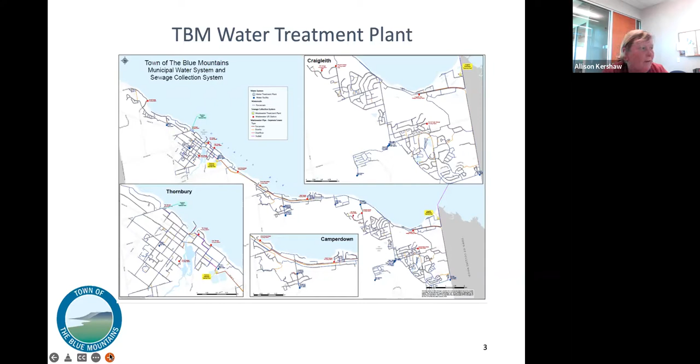This gives us a bit more description of some of our facilities. The elevation in the town of Blue Mountains makes it challenging for a water system, as we have 14 different pressure zones, so we have many different ways of boosting and reducing pressure. You can see a number of different booster stations on the map, as well as reservoirs for additional storage. That's how we manage keeping our water pressure within a reasonable range.

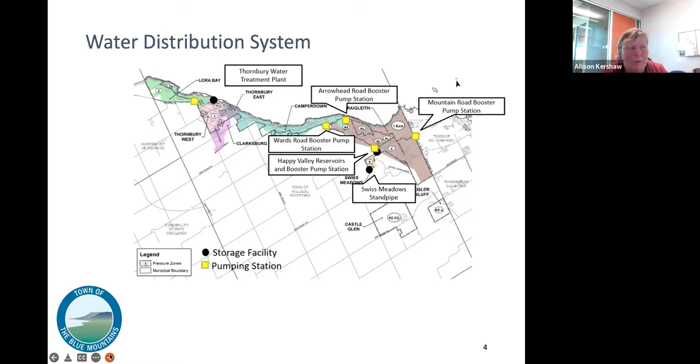For a drinking water system, there's a lot of approvals and oversight. The Ministry of Environment, Conservation and Parks play a big role. They've issued us a drinking water license and a permit. We also have a permit to take water, and we have to monitor how much we take from the bay, with an upper limit to what we can take. Additionally, we have a drinking water quality management system which we're accredited to maintain. We're audited by an external auditor every other year and an internal auditor every year.

Our water plant is situated on the shores of Georgian Bay. It was originally constructed in 1978 with a rated capacity of 5,000 cubes a day, retrofitted in 1988 with 2 Trident adsorption clarifiers giving it a rated capacity of 13,000. In 1991, it was re-rated to 13,536 cubic meters a day. Then in 2009, we replaced the existing conventional filters with a Pall membrane system. Currently we have 3 Pall membrane trains running, but it has capacity for 2 more, so we do have additional capacity at the plant.

So there's our plant. It's at the end of Peel Street at the west end of Thornbury. It's a surface water plant and the source is Georgian Bay. Our intake is roughly 600 meters off the shore, directly out, in 8 meters of water. Really great source water - it's a rock bottom there, and it's excellent source water.

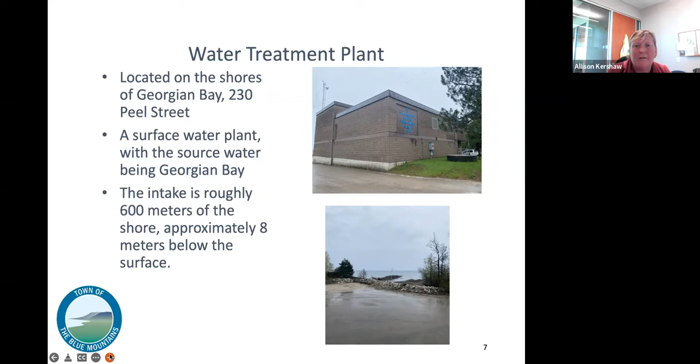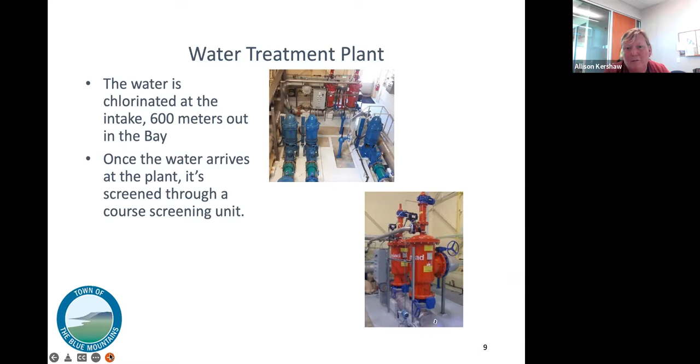That's just our treatment train, and I'm going to go through it in a few more steps in the next couple slides, because that's kind of hard to read, but it shows there's a lot going on. In the top picture, you can see the blue pumps sticking up - those are our low lift pumps, which bring the water into the plant. There's 3 of them, and behind the red, they look like pumps, but they're screens - screening units that do our coarse screening. You can see them in the bottom picture as well.

After it's screened, it goes through the Pall membrane system. That's the 3 trains you can see in the upper picture, and in the lower picture, that's what the inside of the Pall membrane looks like. It's like spaghetti - the untreated water sits on the outside, and it's like a straw, sucking it through the membrane. It does an excellent job of controlling pathogens, and it's really an excellent system.

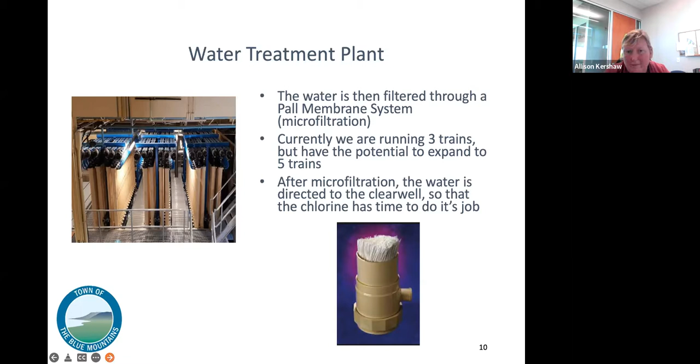After it goes through the membrane system, it enters our clear well. It sits there to allow the chlorine that we put in at the intake to react. We chlorinate with chlorine gas right out at the intake, so it goes 600 meters right out into the bay. Then it sits in our clear well, giving the chlorine time to react and kill everything in the water.

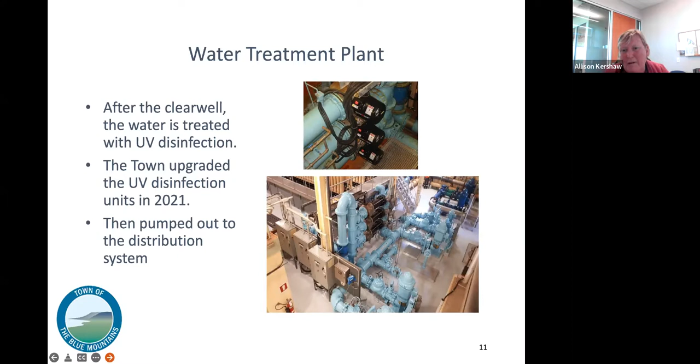After it leaves the clear well, it then goes through UV disinfection. You can see in the lower pictures the 3 UV chambers, and then it's pumped out by the pumps near the bottom - those are our high lift pumps that pump it out into our distribution system. So that's our plant in a nutshell.

Additionally, at the plant, we also have a backup power generator - a 400 kilowatt diesel generator. If the power goes out, or if the power supply is even interrupted, it starts up automatically, so we can continue to make water without even noticing.

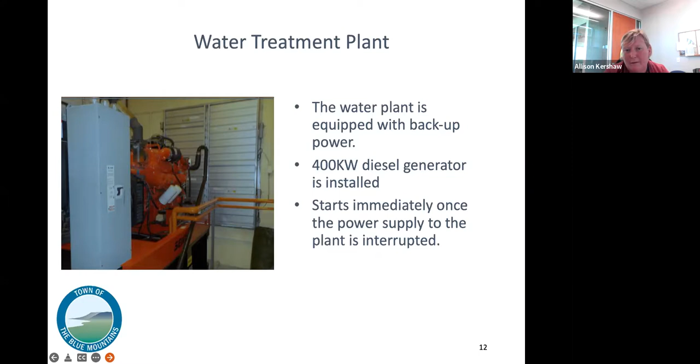So currently our water plant can provide up to 15,140 cubic meters a day. We have an agreement in place with the town of Collingwood to take up to 1,250 cubes a day. However, we only take about 400. And we also supply Collingwood some water too. We feed back into their system, mostly down Long Point Road where they don't have any water mains.

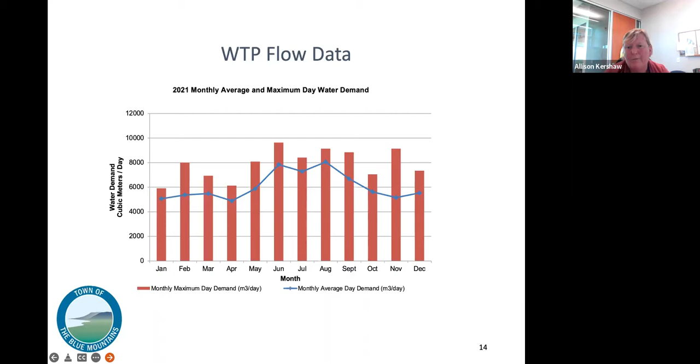So we can move on to the next. And this is where we sit for capacity. So right now our allocated units is the blue, and that allocated means people who are connected already, houses that are connected already, and houses that can connect, meaning that they have a water main in front of their house and they have a lateral to the water main. All they have to do is hook up. So that's how many people could be connected at any point in time.

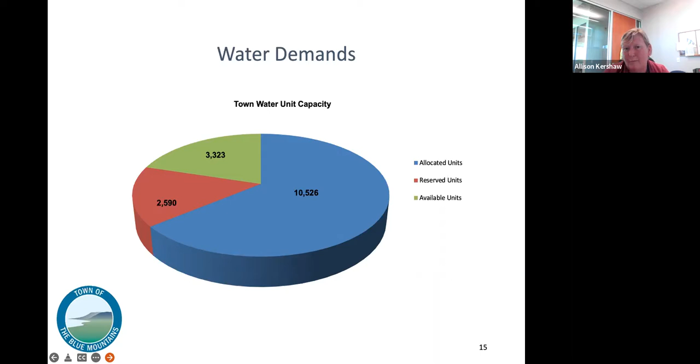And then the next is the red chunk is the reserved units. That means they have been given approval to build a distribution system or a development. And the third, the green 3,300 units, is available to be connected. And those numbers are as of December 31st, 2021.

So this shows our historic water demand over a number of years. The orange line at the top is the total water that's available. Now you're probably wondering, why did it drop down around 2014, 2015? Well, we reduced our water taking from the town of Collingwood. We were taking 4,000 cubes a day, and then we dropped it down to 1,250. So that's why the actual firm capacity dropped down.

The blue line indicates the reserved and allocated. The light green is the allocated, and the dark green is our actual connected units. So you can see that we do have a fair bit of capacity left in that plant.

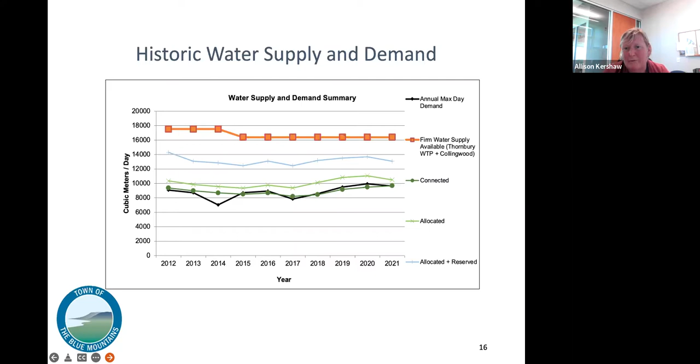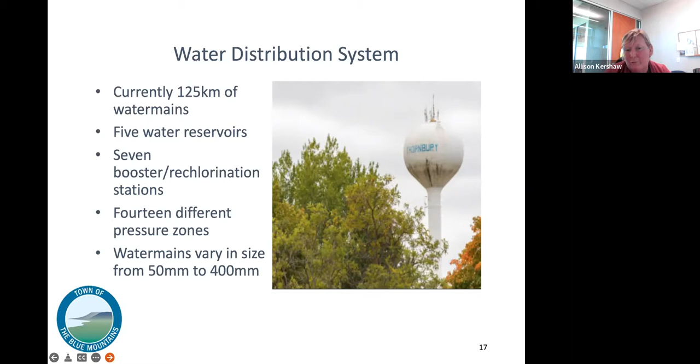On to the next. So our distribution system, we currently have 125 kilometers of water main, 5 reservoirs, 7 booster stations and rechlorination stations, and 14 different pressure zones. And our water mains vary in size from 50 millimeters, which is 2-inch, up to 400 millimeters, which is 16-inch water mains diameter.

And I'll turn it over to you, Shawn. I think you were going to do this one, and then I was going to take it.

Yeah, so this indicates our leaks. This is our infrastructure leak index. And right now we're running about 32% water loss, which sounds really shocking, but when you consider the dynamics of our municipality, and we use a fairly complicated spreadsheet to determine our infrastructure leak index, we are in the good range. Now that considers things like the density of our properties. If we had a lot of properties in a small block, say something like the city of Toronto, we would be selling a lot more water, and therefore, even if we lost the same amount, our percentage of loss would be much lower. However, in the town of Blue Mountains, we have a lot of estate type lots and long stretches where we don't have any users. So we have a number of connections of pipe, and you can think of every connection of pipe, there is a potential for it to leak. So it takes that into consideration, and the pressure zones that we have, we're running about 3.7 on our ILI, which is considered in the good range.

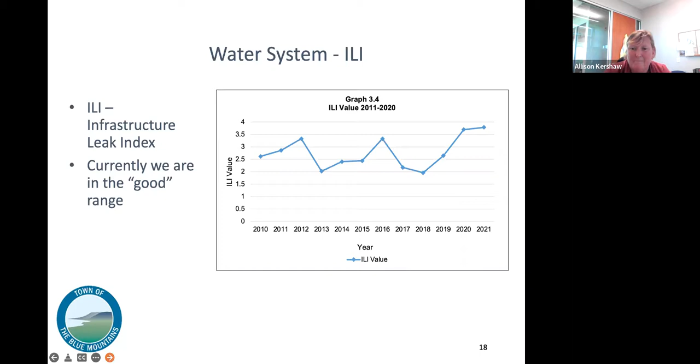So I'll just quickly go through some of the challenges that we deal with our water system. As Allison said earlier, we do have 14 different pressure zones, and that's partially part of our topography, the long run we have of our system along the shoreline. And part of that is trying to keep our water pressure for residents within a certain range, so it's not too high or not too low. And that does cause some challenges for our operators, and there is a cost to doing that as well in terms of pressure reducing valves, et cetera. We spoke about the long, narrow system with few users, and Allison had talked about that and the significant leaks. We'll talk a bit in a couple of slides here about what we're doing to address that. We do have some undersized and challenging water mains. Again, we have a program to deal with that on a capital side.

The other issue, which has been ongoing and as of late, is some discussion with council around common element condos and private water systems and private plumbing within those common element condos that in some cases loop back onto our water main, and our water team does a great job of trying to manage that as it relates to the interface with our public system.

Water theft is an ongoing challenge that we have both with existing users and in development as well. On that, we did get approval from council to add an additional water and wastewater bylaw officer, who has additional kind of penalties now, or will have additional access to other tools in the compliance toolbox, so to speak, to deal with water theft.

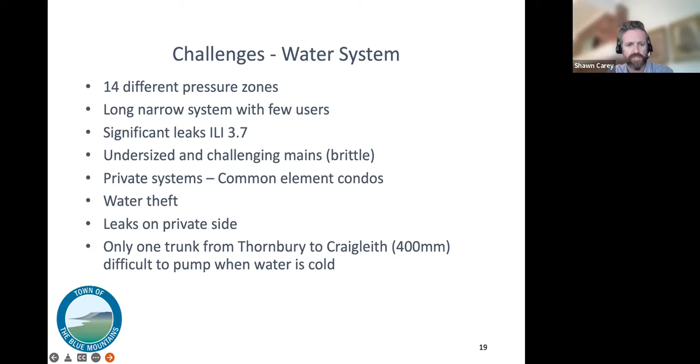We also have leaks on the private side as well as the public side, and we've got a program in to deal with those leaks, and how we deal with it on the private side is a challenge we're trying to address. And then just having only one water trunk main from Thornbury to Craigleith, this is something we'll address a little bit later, but that's causing some operational challenges for us as well.

The other challenge we have is not having enough storage for fire flow in certain areas of the distribution system, and we've got capital projects that we're focused on, and I'll talk about how we're addressing that in a minute.

As Allison said, and as Jim alluded to in his intro remarks, we are reliant on a certain amount of supply from the town of Collingwood in our east end. We do have some flow restrictions out of the water treatment plant, and we have a small clear well, so when we're looking at future expansion plans for our existing facility, that's something we'll be taking into consideration. We do have backup power, as Allison said, but it's not entirely sufficient to run the facility over a certain duration, and we're also looking at UV treatment as well, and some options around trying to address that challenge.

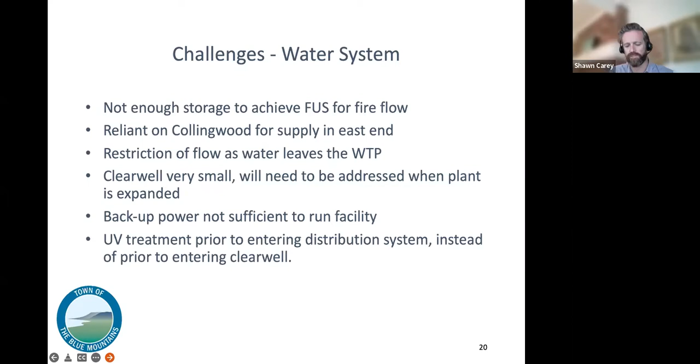Next slide. So here's some things we do have in place, some programs, and Allison's well versed in these. We've shared these with council in the past when we were talking about water loss and in some cases water theft. We do have an acoustic leak detection program in place to try to sort out where we have problem areas from leaky pipes.

We do have a substandard water main replacement program, and I'll speak to that in a future slide. As the ratepayers are likely aware, we are in the midst of about to start reconstruction of the older part of Thornbury, that's Thornbury reconstruction phase 1, and that will really help us with dealing with older infrastructure, particularly on the public and private side.

And we're going to be actively repairing leaks as they become apparent. We are looking at replacement of residential water meters, and that's a capital project I'll speak to. And then we're also working with development to ensure installation of meters in a timely manner.

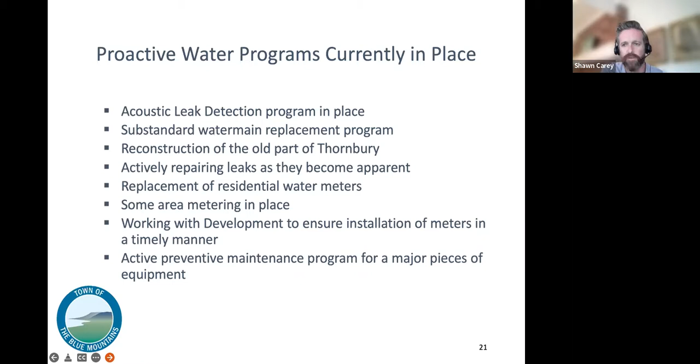This has been a big push as of late to make sure that when development is under build, we're actually metering that water to support that development early on in the process, so that there's no freebies, and that they're paying into the system. And we have an active preventative maintenance program for major pieces of equipment, which Allison and her team do an excellent job of ensuring that we're looking after our assets and our infrastructure.

As I spoke about, we have recently completed some pretty big class environmental assessments. These are important studies to help us understand what our short, medium, and long-term infrastructure needs are. We recently completed the West Side water storage class environmental assessment, which is really addressing our fire storage issue in the west end of the municipality, and we've got capital projects lined up right now that are entering into engineering design to address that.

Clarksburg Master Plan Class EA is finalized. Servicing Clarksburg has been a challenge from a cost standpoint and just technical standpoint as well, and those are two interrelated obstacles, we'll say, or challenges at this point around trying to service Clarksburg in an affordable, but also in an effective and sustainable manner.

Right now, a really important project we have is the East Side Water Storage and Supply Class Environmental Assessment. This is looking for options as to how we're going to get water into the east end of the municipality, and also to store it, and for supply as well. We're actively going through that EA right now, kind of midstream in that process, and we'll probably get into a bit of that later on in the Q&A portion.

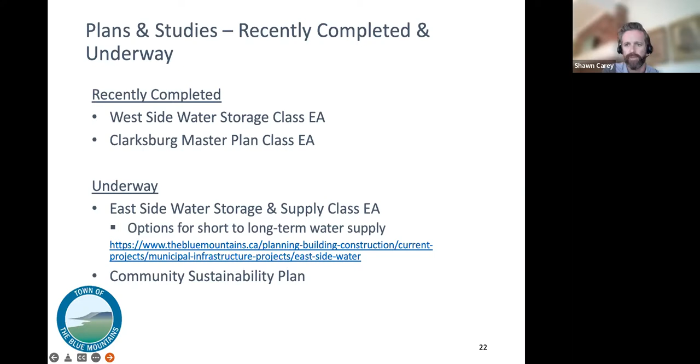I also wanted to put a plug here for the community sustainability plan. This is another ongoing initiative that I hope the members are aware of, because we talk about things like water loss or water usage, and water conservation comes to mind, and the need to have strong water conservation measures in place. Also to make sure that we're building climate resilient infrastructure. So that's a part of what we're looking at with the community sustainability plan. It's a foundational plan that I would hold up there with the official plan.

I talked about Thornbury West reconstruction. That's going to really help both on the wastewater and water side of getting that old infrastructure replaced and dealing with leaks, and just a more effective and sustainable infrastructure. We also have phase 2 of our substandard water main. This is an asset replacement project. I'll speak about that in a minute.

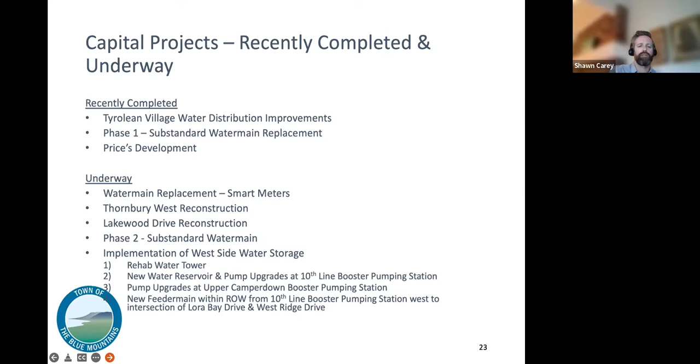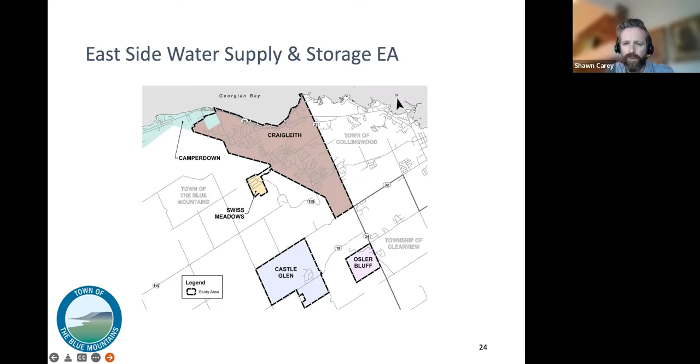Next slide, please. So this is just a quick plug for the East Side Water Supply and Storage EA. This is kind of the area or the nodes that the EA will be focused on. I'll probably leave this slide, I'll move on to the next one because I expect we'll speak to this in the Q&A.

Just a couple of highlights. One of the things to look forward to is we're bringing, at the end of June, our annual capacity report. This focuses both on water and wastewater, and this will be for 2021. It'll show in greater detail what Allison has already talked about, around how many allocated units we have, how many remaining units do we have left within our existing capacity, both on water and wastewater.

One of the things we're quite proud of is we recently received a $3.46 million grant through the Investing in Canada Infrastructure Program, and that's for our substandard water main project. So this is replacing aging infrastructure, which is highly needed, and will deal with leaky infrastructure. It will reduce the amount of breaks that our water team have to respond to, et cetera.

The other thing that we're really proud of, and Allison and I are very proud of our water team, we recently received a 100% compliance rating from the ministry. This is a high bar to make and to achieve, and I think it's really important that our residents and our ratepayers understand the amount of diligence and effort that goes into achieving this type of compliance rating on a very stringent set of rules. And obviously for drinking water, we need to uphold that, and we're really proud of our team for achieving that perfect score.